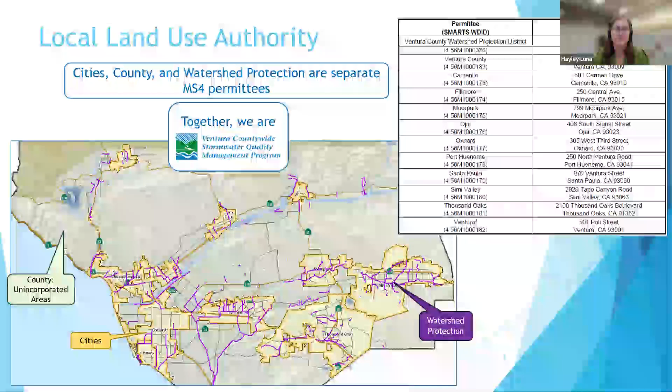Together, the cities, the county, and Watershed Protection make up the Ventura Countywide Stormwater Quality Management Program. So the countywide program, as we refer to it, is a partnership among all the cities, the county, and watershed. It's governed by a management committee, which includes representatives from each agency that provide direction on how these countywide programs should operate. However, it also has several subcommittees.

The one that comes into play today is the Planning and Land Development Subcommittee. This is the component of our MS4 permit that the TGM requirements fall under. Peter is the chair of our Planning and Land Development Subcommittee, so he'll have a lot of great topics since that subcommittee was responsible for developing the 2025 TGM.

I serve as chair for the management committee for the countywide program and support all of the initiatives that the different subcommittees work on, as well as all the representatives from the different agencies. Each agency has representatives that attend each of the subcommittees to provide local input from their municipality and how they are implementing requirements of our stormwater permit.

So that's some brief background. Peter's going to get into a little bit more detail about water quality. Thank you, Hayley. So yeah, we're going to kick off this next topic just as a water quality background. So next slide.

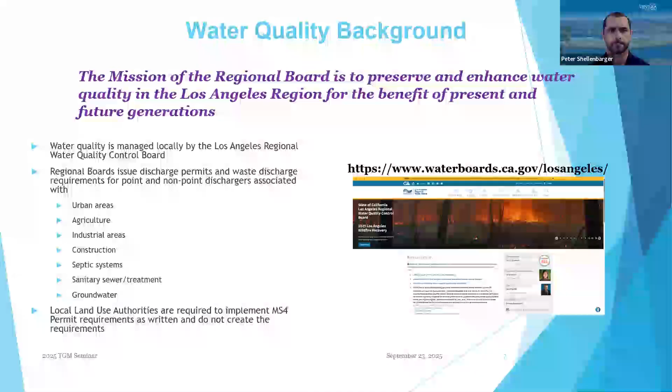So the Los Angeles Regional Water Quality Control Board has adopted 4 MS4 permits in the county. The first was adopted in 1994, Ventura County MS4 permit. The second was adopted in 2000, which was also a Ventura County only MS4 permit. The third was adopted in 2009, was challenged and readopted in 2010, only Ventura County permit. And then the fourth and current MS4 permit for Ventura County is a regional permit, which includes Los Angeles County and Ventura County under one regional permit, and it was adopted in 2021. Each permit includes more stringent and prescriptive requirements as more information and data is available.

Next slide. The regional phase 1 MS4 permit has 6 minimum control measure programs. These are required programs that each agency is required to implement. We will be talking about the planning and land development program specifically today. This relates to post-construction BMP implementation, also known as low impact development. So next slide.

So what are the goals of the planning and land development program? Well, it's the mitigation of potential pollutants from urbanization and urban surfaces, the implementation of non-structural best management practices, and the construction and implementation of structural best management practices. It's really focused on source control and site-specific source control to control potential pollution where it is generated. Next slide.

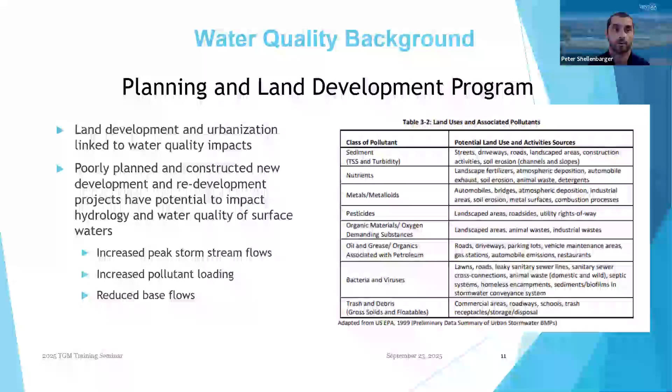We want to note that US EPA and the California Water Boards are really looking at a paradigm shift. So moving away from curb and gutter, transporting stormwater quickly away from development projects, and moving away from small footprint flow-based treatment approaches, and moving the state towards the concept of managing stormwater the way that natural environments do, through infiltration, evapotranspiration, capture and use, biofiltration. And in doing so, this can promote healthier soils, can recharge groundwater, can provide flood reduction benefits, reduce urban heat island impacts, improve water quality, etc.

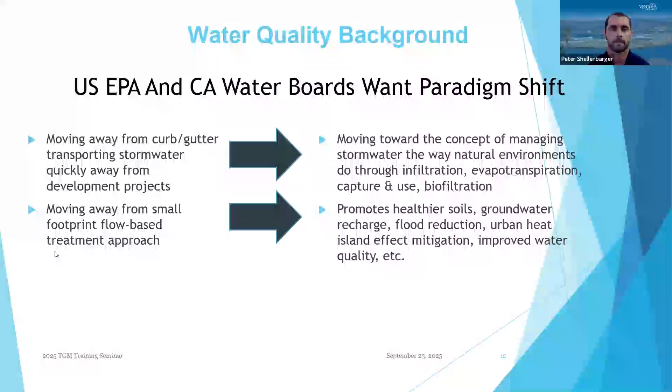So the next topic is really just, hey, we updated the technical guidance manual. This is just general information.

The 2025 Ventura County Technical Guidance Manual for Stormwater Quality Control Measures was created to reflect the changes in the 2021 Regional MS4 permit. The majority of the content within the 2025 TGM is the same as the 2018 TGM. However, we shifted information into different sections to try to improve the readability and the use of the document. I will note that the 2025 TGM should apply and be used for entitlements and new projects that are not deemed complete for stormwater mitigation by May 12th, 2025. If you have any questions about what is deemed complete for stormwater mitigation, please reach out to your local land use authority for clarity.

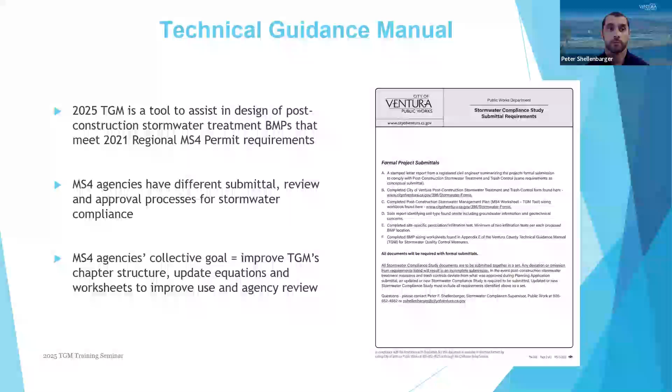I will note that the MS4 agency's collective goal in the 2025 TGM is to improve the chapter structure, to update equations and worksheets, to improve its use, not only for the development community, but also to speed up agency review.

Each TGM version has really built upon the past versions, with the first TGM released over 20 years ago. The 2002 TGM reflected the 2000 Ventura County MS4 permit requirements. The 2011 TGM, the updated 2015 TGM, and the updated 2018 TGM reflected the 2010 Ventura County MS4 permit requirements. And finally, the current 2025 TGM reflects the 2021 Los Angeles Regional MS4 permit requirements. As I noted before, the TGMs are being updated for consistency with current regulatory requirements, and when we find something that needs to be improved, we take it upon ourselves to update it.

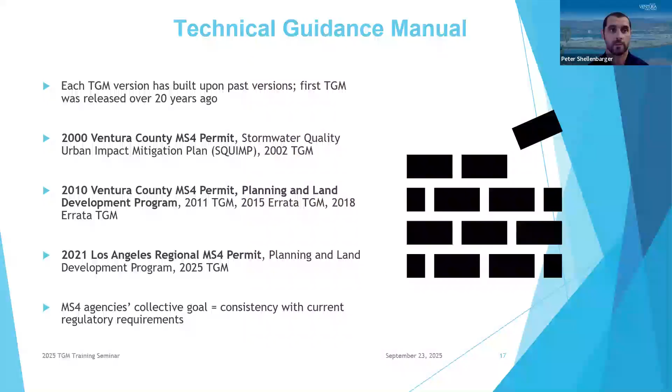The TGM, as I said, is a tool that provides resources and specifications to comply with the regional phase 1 MS4 permit.

Los Angeles County and Ventura County now have the same planning and land development requirements because we were under the same permit. These requirements are very similar to the 2010 Ventura County MS4 permit and the 2012 Los Angeles County MS4 permit.

Just to reiterate, the 2021 MS4 permit, just like the previous MS4 permits, require agency review, approval, and plan checks to ensure that the new and redevelopment projects are implementing post-construction BMPs as requirements as outlined by the permit itself. These are strict adherence to MS4 permit requirements that the local land use authority needs to ensure are being met.

New and redevelopment projects that are triggering the planning and land development requirements require operations and maintenance plans and maintenance covenants to ensure that long-term maintenance is provided to these BMPs in perpetuity. I will note that routine maintenance of the right-of-way, emergency work, reconstruction of parking lots that keep existing line and grade, and the implementation of ADA requirements that also maintain existing line and grade typically do not require stormwater mitigation incorporation, but if you have questions regarding what is referred to as routine maintenance, please reach out to your local land use authority for clarity.

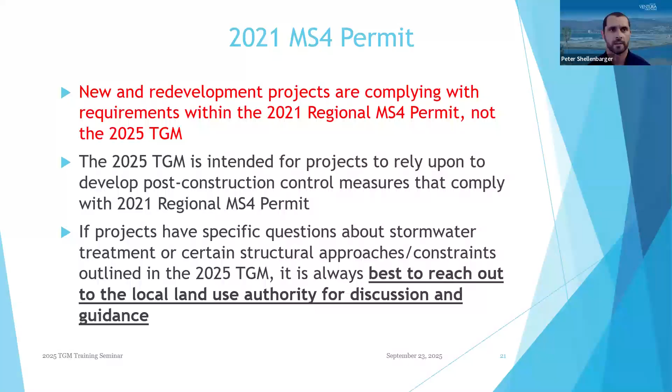As noted before, if you have project-specific questions about treatment or constraints of a site, it is always best to engage your local land use authority early during the entitlement phase so that you can work out any challenges early on, to not slow down the project during entitlement and approvals, and so that it doesn't occur during plan check.

In the next few slides, what you're seeing in red is just a change. I just want to highlight changes under the 2021 MS4 permit that are important.

With regards to hydromodification management requirements, priority development projects within natural drainage systems in Los Angeles County are required to implement hydromodification controls. But only priority development projects disturbing land areas of 50 acres or greater in Ventura County are required to implement hydrological control measures. This should decrease the number of projects subject to hydromodification management in Ventura County, and it may require more projects in Los Angeles County to control for hydromodification.

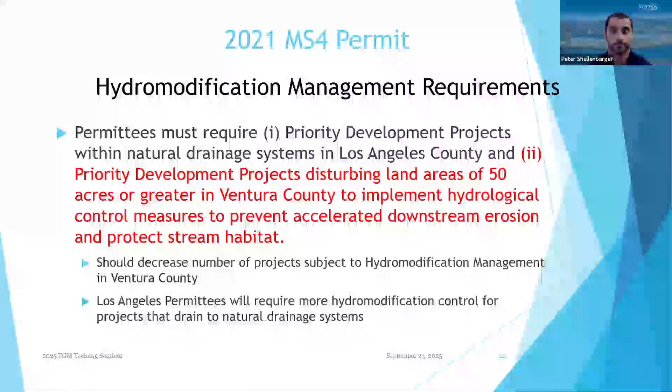In terms of water quality and flow reduction requirements, I just want to highlight that the stormwater quality design volume is the volume of water that post-construction BMPs need to mitigate, and it has been updated in the 2021 MS4 permit. So the SQDV is defined as the greater of the following: the runoff from the 3/4 inch 24-hour rain event, or the runoff from the 85th percentile 24-hour rain event. In the 2010 Ventura County MS4 permit, this was an 'or,' but under the 2021 MS4 permit, this is whatever is greater between the two.

I will note that the 85th percentile 24-hour rain event is available on a GIS web-based map on the Ventura County GIS portal. It is linked in the 2025 TGM document, so it's very easy for projects to identify the 85th percentile 24-hour rain event right now. The stormwater quality design flow is a flow-based measurement.

To utilize flow-based measurements under the 2021 MS4 permit for post-construction BMPs, you need to have the executive officer approval from the Los Angeles Regional Water Quality Control Board. You will need to filter or treat the maximum flow rate of runoff produced from a rainfall intensity of 0.2 inches of rainfall per hour for each hour of a storm event, or the maximum flow rate of runoff produced by the 85th percentile hourly rainfall intensity. It also needs to be certified for enhanced metals treatment under the Washington State Department of Ecology's TAPE program.

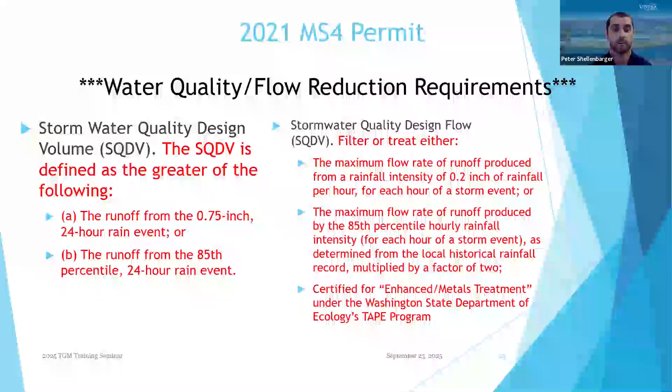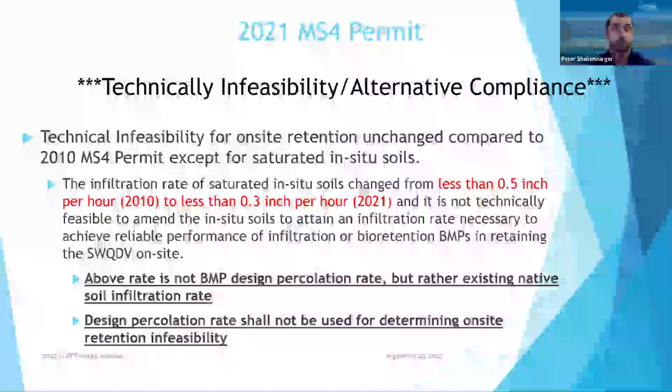For changes under the 2021 MS4 permit regarding infiltration infeasibility, under the 2010 MS4 permit, technical infeasibility for infiltration was infiltration rates less than 0.5 inches per hour. Under the 2021 MS4 permit, it is infiltration rates that are less than 0.3 inches per hour. I will note that it is not technically feasible to amend the local soils to attain an infiltration rate necessary to achieve reliable performance of infiltration.

The above noted rates are not BMP design percolation rate, but rather the existing native soil infiltration rates. The BMP design percolation rates used for sizing BMPs shall not be used for determining on-site retention infeasibility.

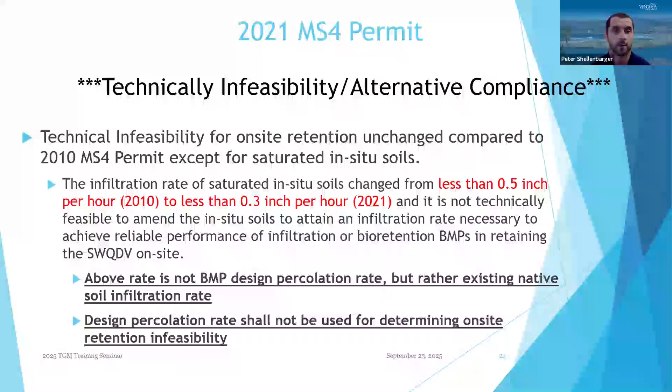The structural BMP water quality mitigation hierarchy, or the steps to identify what type of BMP to implement on site, has not changed. The approvals have changed, but Ty will go into that a little later today. The first priority outlined in the 2021 MS4 permit is on-site infiltration, bioretention, or rainwater harvesting and use, which is a BMP focused and sized for a volume of water. This is retaining the water on site.

Now, if the first priority above is infeasible, on-site biofiltration, off-site groundwater replenishment, and/or off-site retrofitting, using a BMP that is sized for a volume, can be pursued. And if priorities 1 and 2 are infeasible, then on-site flow treatment can be pursued, which is a flow-based or flow-sized BMP. However, as I noted before, this requires the executive officer approval from the Los Angeles Regional Water Quality Control Board.

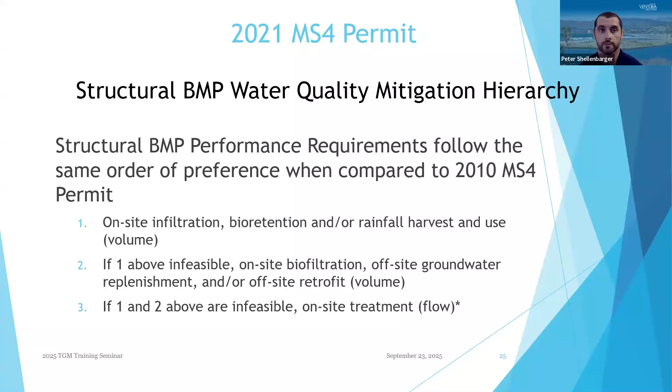I'm not going to be talking about retention, only the alternative compliance and on-site biofiltration. So on-site biofiltration continues to biofilter 1.5 times the required retention volume.

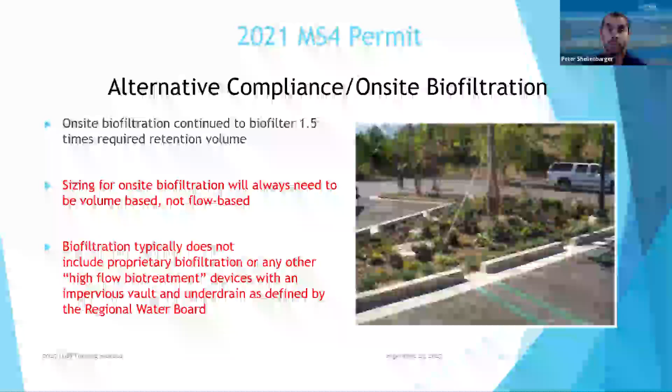Sizing for on-site biofiltration will always need to be volume-based under the 2021 MS4 permit, and it cannot be flow-based. And biofiltration typically does not include proprietary biofiltration or any other high-flow biotreatment devices with an impervious vault and underdrain, as defined by the Regional Water Board.

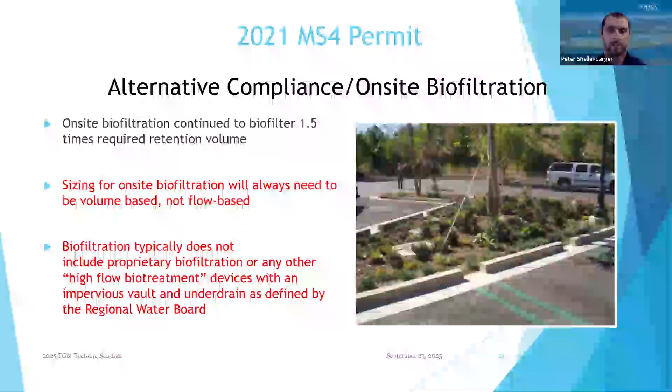So in the image to the right, you're seeing a biofiltration system that was designed per the technical guidance manual. Next slide, please.

Alternative compliance for offsite mitigation measures. There's also a way to comply with the planning and land developments program if on-site retention or on-site biofiltration is infeasible. But I will note that offsite mitigation is available, but it is really dependent upon an available agency's programs or ability to retrofit another private development, an existing private development, I should say.

So offsite infiltration projects and groundwater replenishment projects, if a project is looking for alternative compliance for offsite mitigation and you have questions about if offsite infiltration or groundwater replenishment is available in the subwatershed, please reach out to your local land use authority for questions.

These regional projects must be situated in the same HUC 12 watershed as the new redevelopment project. Also, offsite project retrofits - this is also reach out to your local land use authority for availability.

However, it is also good if you have or can partner with another private development to retrofit in a similar existing land use.

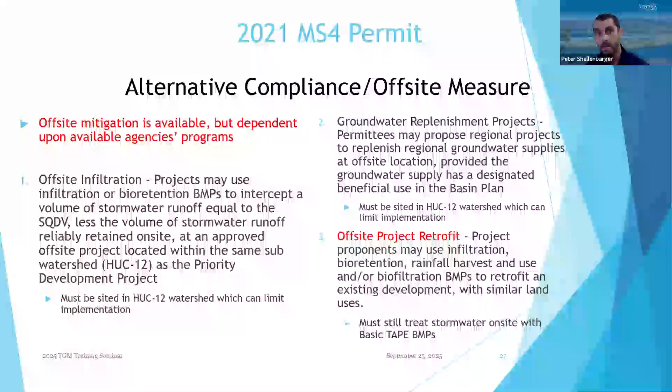Any offsite alternative compliance offsite measure needs basic TAPE BMP treatment at the new redevelopment project. So you would need to treat the water using basic TAPE BMPs of the new redevelopment project, as well as have an offsite mitigation effort. So keep that in mind.

Next slide. Under the alternative compliance on-site flow-based BMPs under the 2021 MS4 permit, there's a little bit of a change here in the approval process. So if a permittee determines that on-site biofiltration and off-site alternative compliance measures are not technically feasible, the permittee may request the executive officer allow the use of on-site flow-based BMPs.

And in the request, the permittees must outline why none of the other alternative compliance measures are feasible. And approval will only be granted to areas where other alternative compliance measures are not feasible due to significant technical issues.

So typically, you want to be discussing this with your local land use authority very early on in the entitlement phase, because typically the local land use authority will want to have executive officer approval before a project is entitled.

The permittee will submit on behalf of the new redevelopment project that is pursuing alternative compliance via on-site flow-based BMPs. However, the local land use authority will not be generating this document. It will be the responsibility of the private developer to create documents that will be submitted on their behalf by the local land use authority.

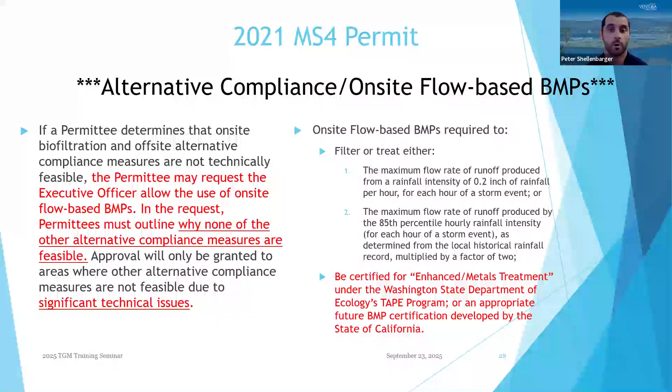On-site flow-based BMPs, as noted earlier, are going to be typically a CFS-sized BMP, and they are required to be certified for enhanced or metals treatment under the Washington State Department of Ecology's TAPE program, or an appropriate future BMP certification developed by the state of California.

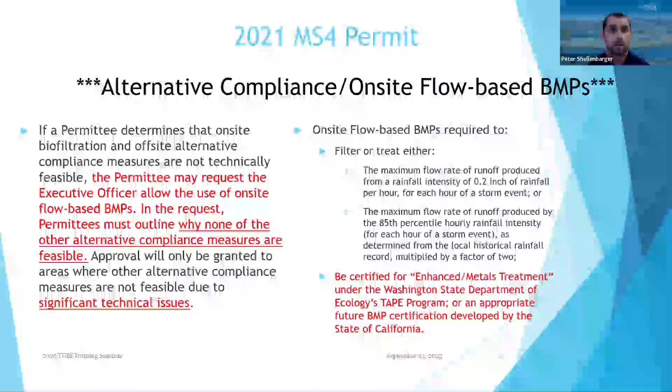And I will note that there is not a program right now for the state of California for approved BMPs. Next slide.

And I will pass this over to Tai now to get more into the technical work. Thank you so much, very much, Peter, for that overview of the MS4 permit and the TGM.

For this section, everybody, what I'm going to focus more is on the technical aspect of the TGM and also giving everybody a quick overview of the 2010 MS4 permit requirements. And the reason I want to do that is because to give us a sense of what was required before, and then we'll compare that to the 2021 MS4 permit requirement.

Then we go into the 2025 sizing calculation. And again, do a little bit of comparison. We'll look at common required items, the remove required items, the new and modify required items, as well as civil sizing calculation for your benefit.

Next slide, please. So this is a quick recap of what Peter was describing, but this is more of the numerical aspect of the MS4 permit. We have 10 different categories here for the new development triggers.

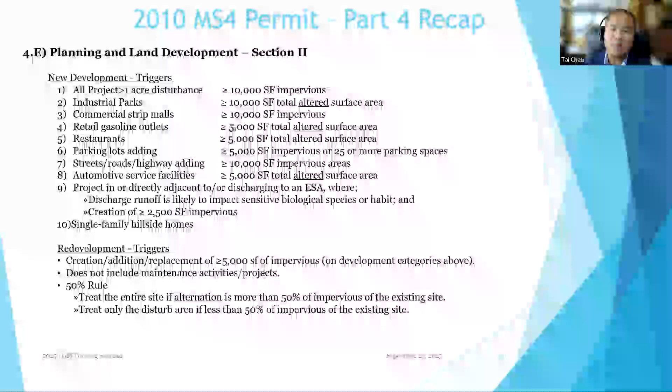For the most part, I think a lot of people are going to be focusing on item number 1 or category number 1, which has to do with the disturbance of land more than 1 acre with 10,000 square feet or more of impervious area, right?

And then we go down to the industrial park, commercial, strip malls, retail, gasoline, restaurant, parking lot, and so forth. It also includes, by the way, streets and road reconstruction or construction that are adding 10,000 square feet or more of impervious area.

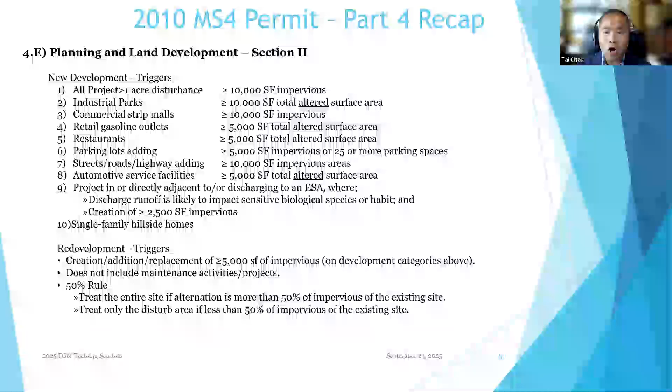When it comes to redevelopment, we want to make sure that everybody understands the 50% threshold. And of course, the trigger is when you are creating, adding, or replacing 5,000 square feet or more of impervious area on an existing project site. Next slide, please.

So when it comes to the BMP selection, this is essentially the priority in which we like everybody to go through. And this is what the MS4 permit is also guiding us. The first priority is obviously infiltration-based BMP. We want to have a system that can collect, pre-treat, and then infiltrate the runoff via surface or underground. Typically, this includes infiltration basin, infiltration trench, bioretention, dry well, as well as permeable pavement.

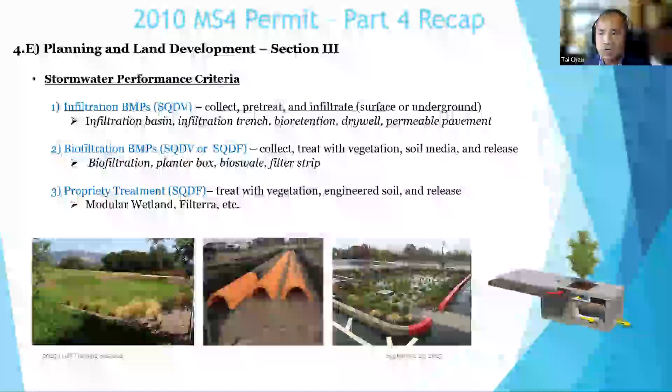Then the next category is, in the case that the soil cannot actually have adequate infiltration rate, then we move to biofiltration. So these devices are essentially intended to collect, treat with vegetation, a soil media section, and then release. They include biofiltration, obviously, as well as planter boxes, bioswale, and filter strip. And again, I want to mention to everybody again here, this is from the 2010 MS4 permit, which is for the 2018 TGM. So this is just a baseline so that we are going to see the comparison between this previous version versus the version that we have now.

Last but not least, we have the proprietary treatment devices that essentially treat with vegetation, but the soil media is extremely engineered with a very high infiltration rate. So typically you see modular wetland system. Filterra is probably one of the most popular ones we have seen out there. Next slide, please.

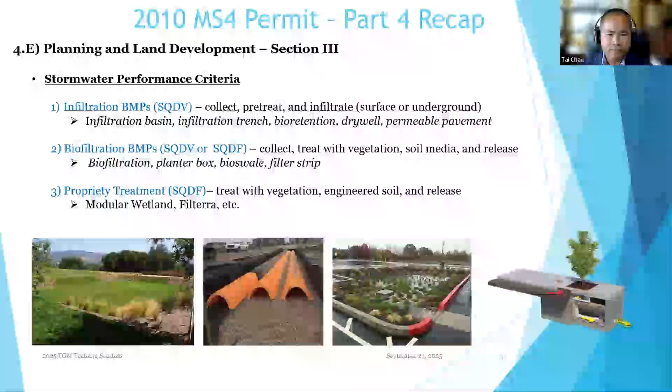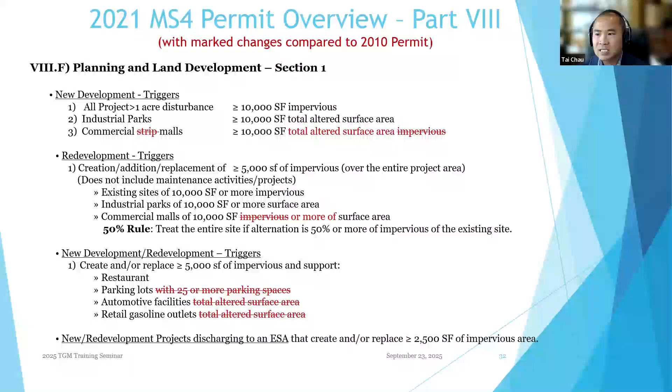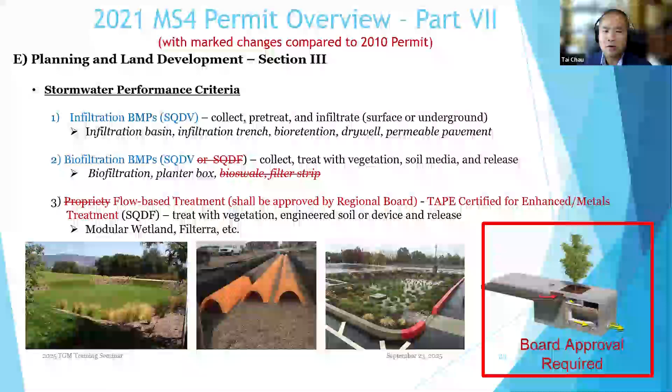So in this section, we are talking again about the stormwater performance criteria, right? And so we're still looking at doing infiltration-based BMP, and this is what Peter has conveyed previously on his slide. We want to collect, pre-treat, and infiltrate. The systems are essentially identical to the previous requirement. We're talking about infiltration basin, infiltration trench, bioretention, dry well, permeable paver. And then the next one is biofiltration. Note here that biofiltration is now SQDV, which is volume-based sizing. And we only have biofiltration and planter box. Bioswale and filter strips are no longer considered biofiltration BMPs.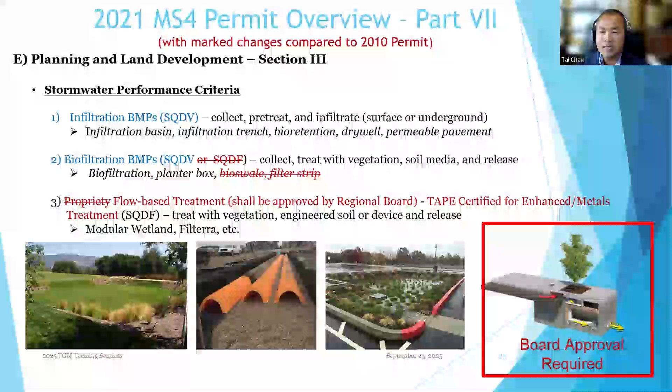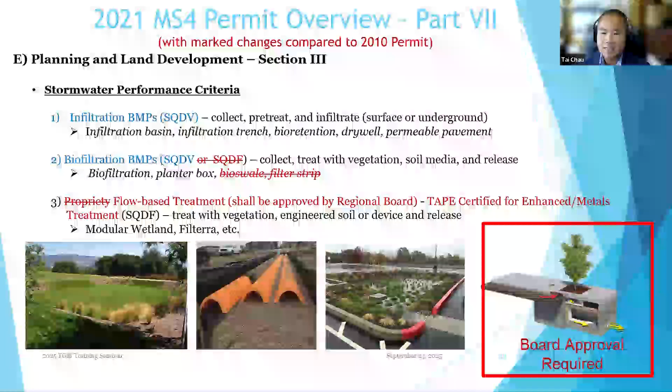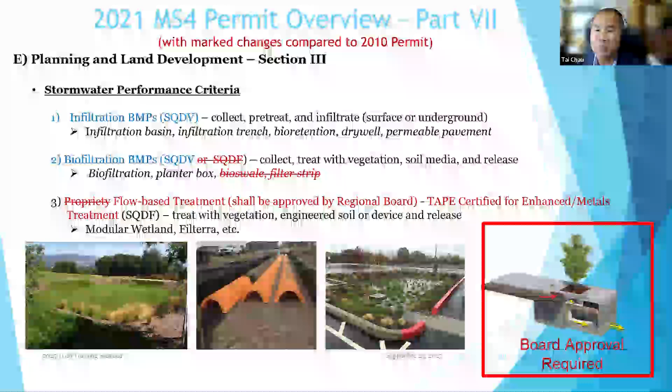However, they are considered as pre-treatment BMP if such pre-treatment is proposed for, let's just say, an infiltration basin. That is still appropriate. And thirdly, the flow-based treatment is still on the permit. It is still permitted, of course, via the executive officer approval. And it's essentially what we had last time, which is treat with vegetation, engineered soil, or device, and then release. Again, modular wetland and Filterra are the two popular systems that we have seen repeatedly proposed on many project sites. Next slide, please.

So here is a slideshow showing the technical similarities and differences. The soil infiltration rate we've seen in the last TGM indicating 0.5, but what I want to emphasize here is that the 0.3 inches per hour is still that philosophy of making sure that the infiltration basin can function properly. And then we also have the pre-treatment forebay requirement for infiltration-based basins. We still have the 5 feet above the seasonal high groundwater, just to make sure that we don't get those basins too close to the seasonal high groundwater.

And then, of course, we still require the 150% SQDV volume for the biofiltration-based BMP. The SQDV equation, which is based on the 3/4 inch or 85th percentile 24-hour event, is still the same. There have not been any changes on that equation. The SQDF equation, again, it's still the same thing, right? And even though the 85th percentile hourly rainfall event is also a criteria, I think most of the projects are going to use the 0.2 inch per hour just because that's easier and readily available.

The things that have been removed from the 2025 TGMs are the 5% EIA, right? The A retained has been replaced as A project or A tributary. The bioswale and filter strips as primary BMPs have been removed, now considered as pre-treatment. And the 80% average annual runoff volume, that has been removed.

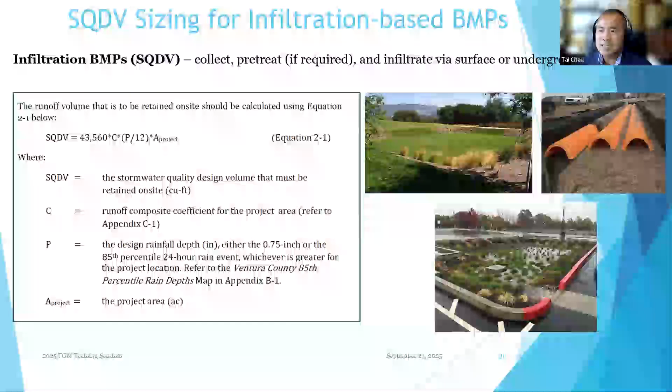Next slide, please. Okay, so when it comes to infiltration-based BMP, it's simply to collect, pre-treat, and then infiltrate. The SQDV equation that you see here is very much the same as before, and it's really simple. It's only depending on 3 things. The first one is the runoff coefficient. This is the composite coefficient. Your project site may have 2 tributary areas, or you may have a project that is simply 1 tributary area. In this case, that's the equation that we see here.

But the runoff coefficient in this equation, you want to make sure that it is a composite, meaning it is a mixture of the impervious and pervious area within that tributary. And then we're talking about the P, which is the 3/4 inch or the 85th, whichever is higher of the 2. And then the A project, which is A tributary as well. So this equation is pretty simple. All it is doing is calculating the rainfall volume that is landing on the project. Next slide, please.

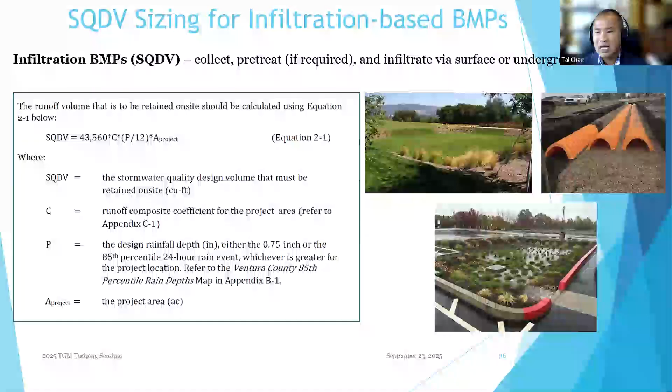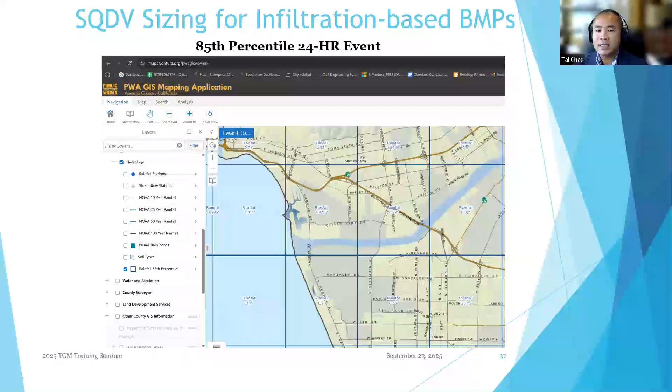And this is the 85th percentile 24-hour event GIS map from the County of Ventura. So this is something that everybody would need to do: go in and locate your project, making sure you have that 85th percentile rainfall event, identify it, and make sure that it is indeed higher. If it is not higher, then you go back to the 3/4 inch. Next slide, please.

Okay, so when it comes to the sizing of the system, you want to use the TGM worksheet in your design calculations. I understand that some people may want to modify and make their own, and in most cases that is okay, but we highly encourage using the worksheet. The reason why is because the worksheet is very familiar to all of us as the governing agency. So if we see something that is familiar, it allows us to review the project quicker and locate the volume and the project area in a very efficient manner. So please do use the worksheet in your design calculations as you submit them for entitlement purposes,

as well as construction documents. So in this example, we have a project site that is 10 acres with 60% total impervious, right? And of course, for simplicity's sake, we are using the 3/4 inch. So it's simply a plug and chug. We have 10 acres, we have a C composite of 0.59, and then we have the rainfall depth, which is 3/4 inch divided by 12, and that is what we get, 0.06. I think it's 0.0625 if you want to carry out the decimal. But in essence, you just plug it in.

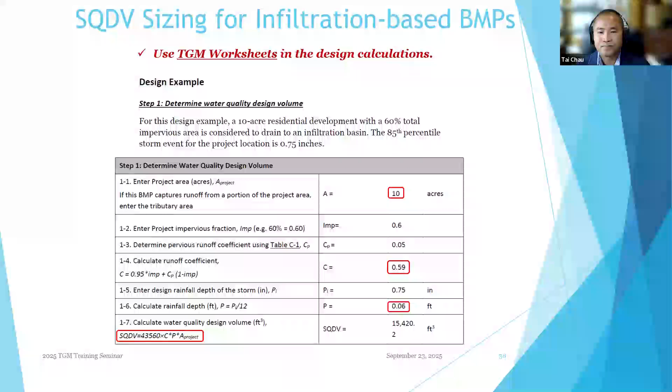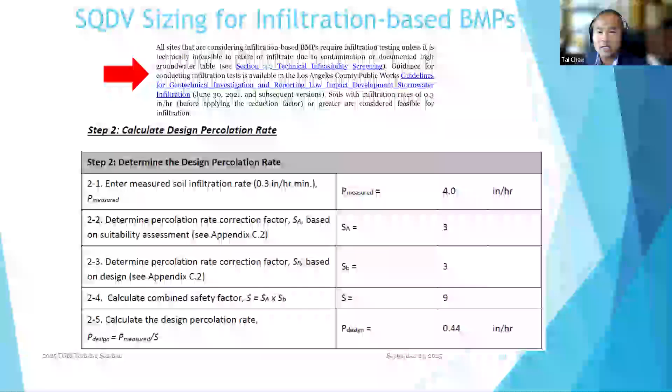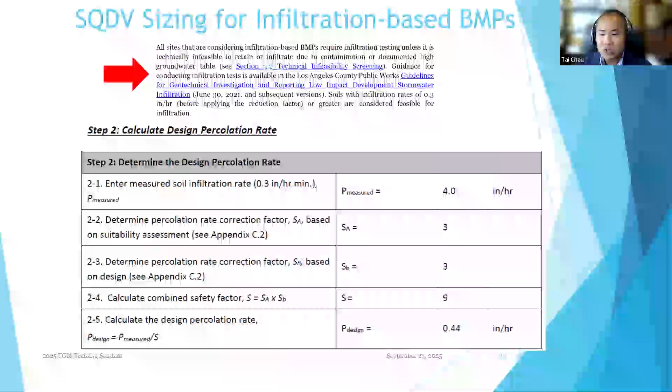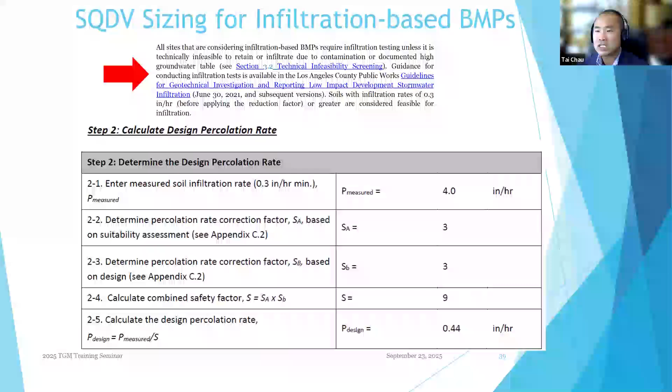However, the infiltration rate of 0.3 inches per hour is the applicability for feasibility, before applying the reduction factor. So make sure you review that very carefully before you go down the route of choosing a system, whether it is a biofiltration or infiltration-based system. Essentially, once you have that P measure rate, you simply apply the percolation correction factor from the TGM itself. This, in essence, is a long-term factor that allows the system to function as intended over a long period. And at the very end, what you have is a P design rate that is significantly lower than the P measure. The percolation rate correction factors, SA and SB, are going to be based on your judgment of what you think is best, based on the design and construction, as well as the physical location of the BMP. Next slide, please.

Okay, so this slide right here is very critical for a lot of engineers, from my professional experience. Now we know the volume, right? Now we know the infiltration rate. So how do we find out the required area? In this example, we actually have two different options. What you want to pay attention to here is the Dmax. The Dmax is the maximum depth of ponded water, both on the surface and in the soil and the rock, that is allowed based on the natural infiltration rate of the soil at the project site. So in this case, we have 2.64 feet as the maximum.

And then on this worksheet, you enter the DP, which is the ponding depth. The ponding depth has to be less than the Dmax minus the depth of the soil. So if you work the other way around, what it's saying is that, if you look at that figure on the right-hand side, the DP plus the NT multiplied by the DT shall be equal to or less than the Dmax.

That's what it's saying. So that figure is something that you've got to pay attention to. And then last but not least, once you plug in all of that, you want to figure out the footprint of your infiltration basin. And there are two equations that you've got to pay attention to here. One equation is for the infiltration basin.

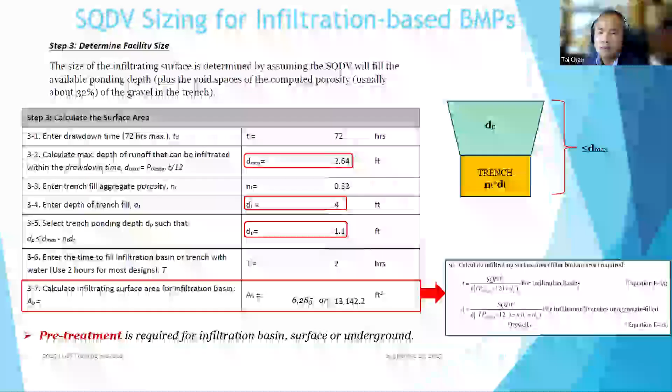Last but not least, make sure whether pre-treatment is required, depending on whether you are selecting a surface-based basin, underground, or bioretention. I believe bioretention does not require pre-treatment. It is always encouraged. Next slide, please.

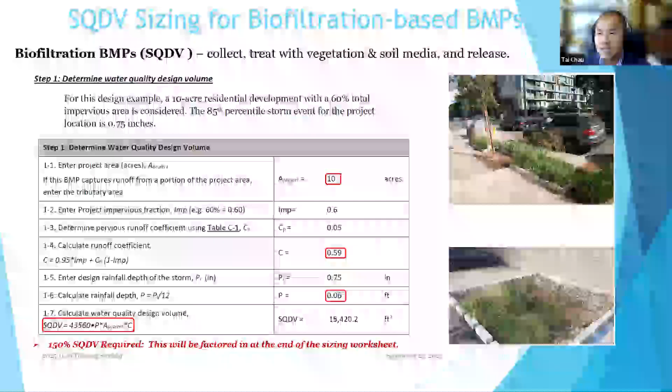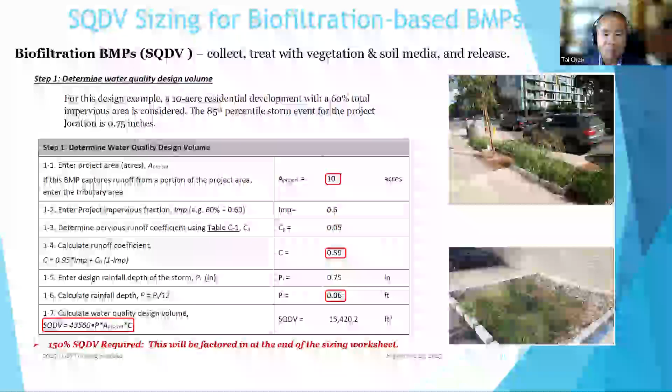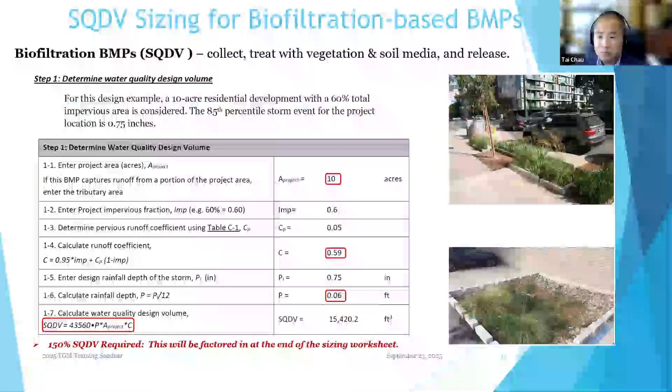So we are moving on to the biofiltration BMP, which is still an SQDV-based treatment system. In this design we are looking at essentially a biofiltration system or a planter box; they function identically. In this example, we are still using essentially the same equation as in the prior example. The SQDV here is the same: 43,560 multiplied by the rainfall depth, which is 0.06 feet, multiplied by the project area, which is 10 acres, and multiplied by the composite C coefficient, which is 0.59. And again, we get the exact volume as we did under the infiltration-based design.

Now, pay attention. When biofiltration is used, the 150% factor applies. It's not applied here yet. We are just simply getting the SQDV. The 150% factor will need to apply when you get to the step when you're actually sizing the footprint of the system. Next slide, please.

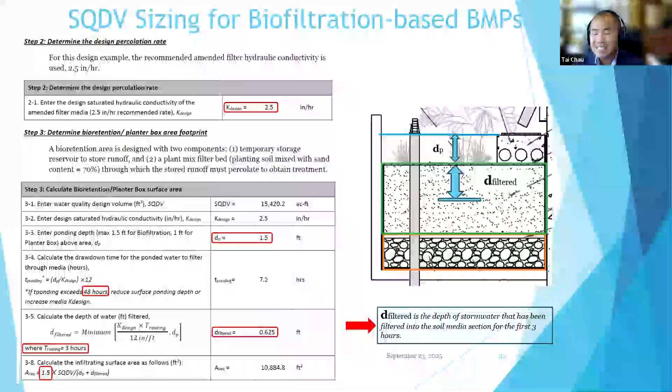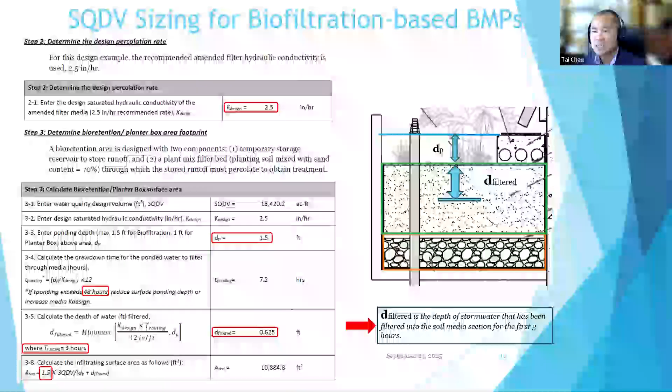So when it comes to the calculation of the area here, we now need to incorporate back the 150% volume. For that 150% volume, we want to take the SQDV, multiply it, and simply divide that by the dp plus the d filtered. That would essentially provide the project with the footprint of the biofiltration. Obviously, by doing so, this system is going to be significantly bigger than the infiltration base. So we highly encourage everybody to explore your project site, explore your soil, to make sure that you can infiltrate. There is a lot of benefit to coming up with a geometry that best fits the project site when an infiltration-based system can be used. But we understand that there are projects with clay soil that cannot infiltrate, so certainly this biofiltration is also a good system that can be utilized in those cases.

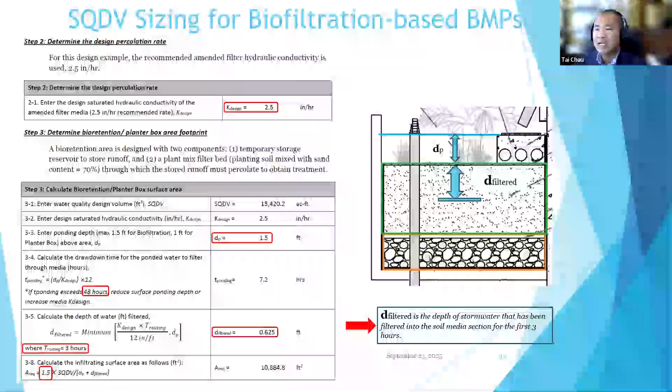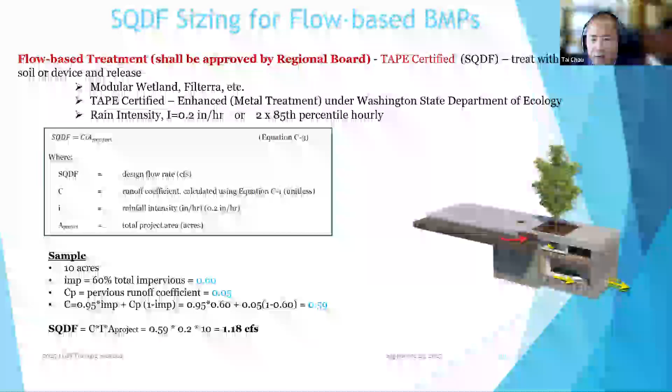Lastly, but not least, we'll touch really quickly on the flow-based treatment. The equation is quite simple. We're talking about SQDF, which is essentially the runoff coefficient composite, multiplied by the rainfall intensity, usually 0.2 inches per hour, and then multiplied by the project area or tributary area. In this case, we are looking at a tree filter type, using the same project we've used throughout the presentation. We have 10 acres, the project has 60% total impervious, and a pervious runoff coefficient we're assuming is 0.05. Using the composite equation, we have a C value of 0.59, and at the very end we have a flow rate, SQDF, of 1.18 cubic feet per second.

So the sizing of the SQDF is straightforward, as you can see here. Each individual designer will need to go to the Washington State Department of Ecology and select the appropriate device, making sure that device is the enhanced, a.k.a. metal treatment device. You want to look into each device to see how they're sized to provide those treatment flow rates. The capacity flow rate for each device will vary based on who is making it and how they're designing for it. But remember, in my opinion, this is the last resort because it will require regional board approval. So I would highly encourage people to go through the infiltration base and then the biofiltration, understanding that in some cases we may have to do this flow-based device.

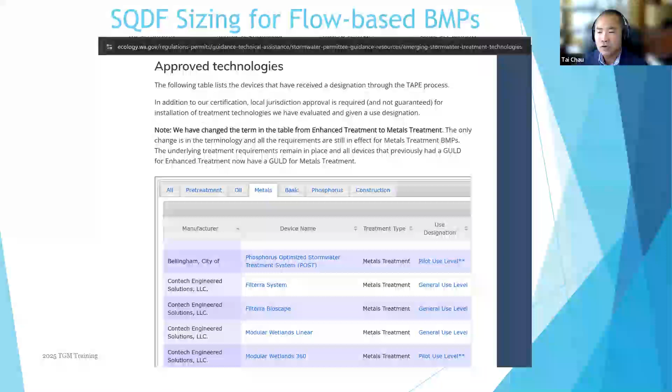Next slide, please. So that's pretty much it for the sizing calculation samples. I look forward to the questions and be happy to provide feedback. Back to you, David. All right, thanks Tai, Hayley, Peter.

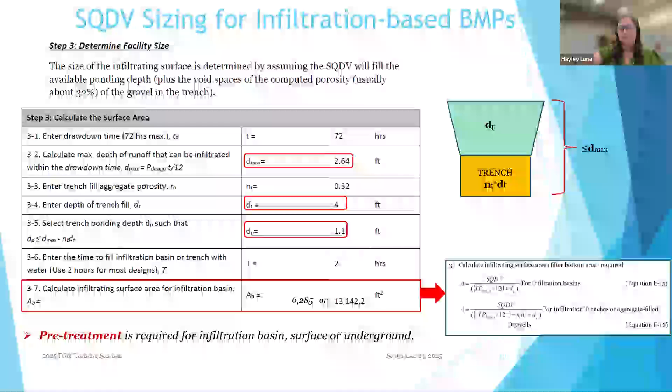Is this slide 40? Yes, this is slide 40, speaking of bioretention systems having underdrains. I believe we've discussed this during previous meetings, so we'll be making an adjustment to the 2025 TGM — bioretention systems shouldn't have a perforated underdrain, only if it's sized as infiltration, right? Yes, if it's sized as an infiltration BMP example, I would say no underdrain. Sorry, Peter, to jump in. Oh no, that's perfect. But if you're sizing it as a flow-through biofiltration BMP, then you would have an underdrain, and you'd have to treat 150% of the SQDV.

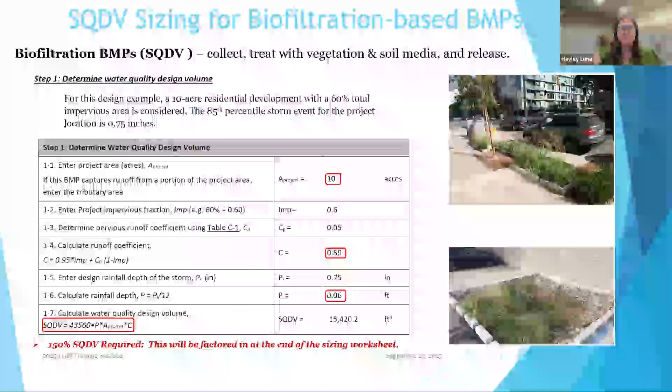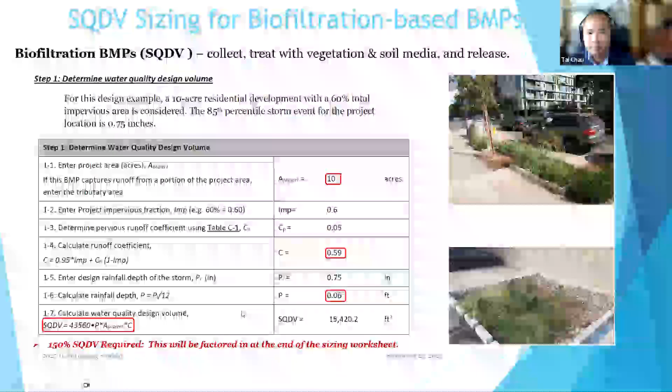If we take a look back at slide 40 — can you go back to slide 40 for me, David — the SQDV for the infiltration-based basin is the same for all of them. The calculation comes down to sizing the surface area for that facility. So the equation is simply the SQDV divided by the depth of that facility. The depth of the surface-based infiltration without any rock is going to be the DP mostly.

But if we're talking about an underground infiltration basin, then it's more appropriate to use the second equation shown here in the bottom right-hand corner, for infiltration trenches or aggregate-filled dry wells. So the underground infiltration basin uses that equation because it accounts for the aggregate rock. In this case there is no ponding depth, so the DP essentially disappears, and NT multiplied by DT becomes the governing section. The porosity of underground basins is typically much higher than 32% — it could be as much as 75% for some systems. So you just have to make sure the DP is indeed 0, and use NT multiplied by DT accordingly.

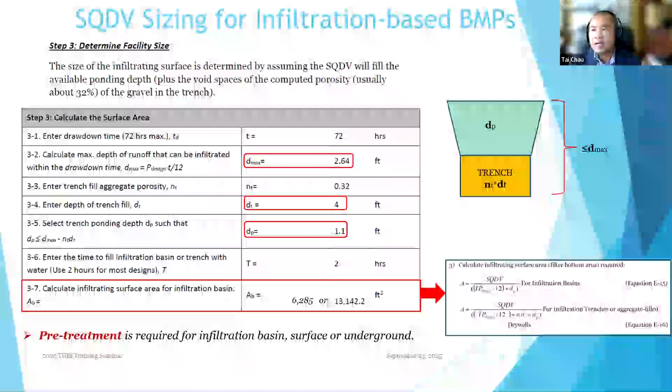I'll make sure to go back to your question and provide additional information in the written responses. And I'd add, I've seen it done both ways through the county, and I've seen it done adequately both ways — it depends on your calculation method. Using INF-6, I've seen HydroCAD models supporting those calculations in the past. So I'd say it's really important to talk to your local land use authority about the process you're thinking of using to show sizing if you're trying to choose between those two options.

All right, Kinsley's got another question. Why is there a limit to the tributary area for the planter box option? Is that flexible depending on the size of the planter box and the way you distribute the roof drains?

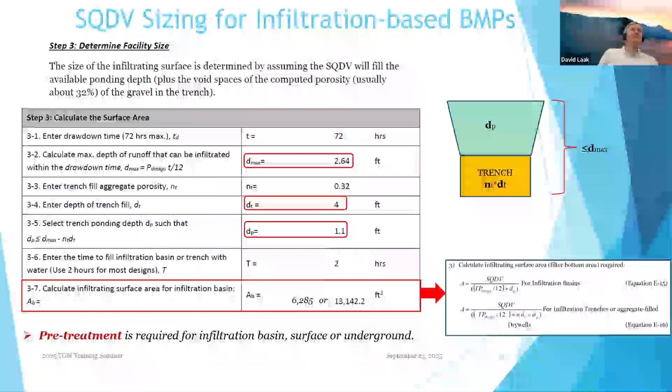Haley? I think I'm actually going to throw that to Tai. Tai, do you have thoughts? I don't necessarily understand the question to its full extent. If Kinsey, if you can type another explanation to that, I would appreciate it.

But I will provide the response, generally speaking, that we don't necessarily want to limit the capacity of the system. So if you have a roof drain, which is rather large, and you want to drain that into a planter box for treatment, I don't think... we as a public agency, we would be happy to work with you. But as far as I know, I don't think there is a tributary.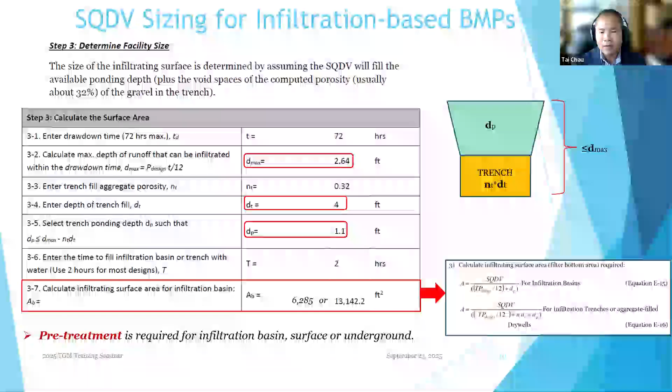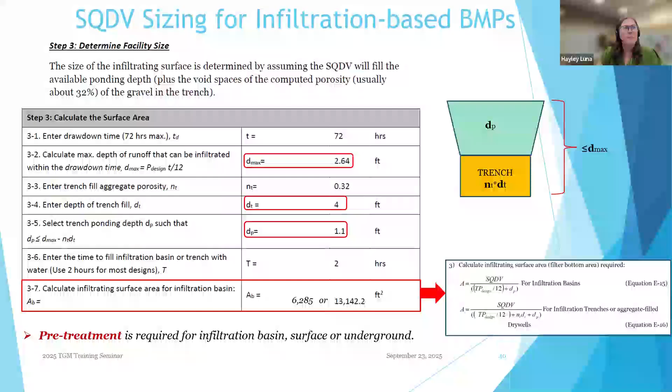Yes, thank you Nicole for talking about the 15K. We'll probably have to revisit that as a committee to understand the limitation and why it is there. But as the local agency, for me anyway, I'll speak on the city of Oxnard, would be happy to work with you on that limitation. That might be something that was carried over from the last version of the TGM that we could review.

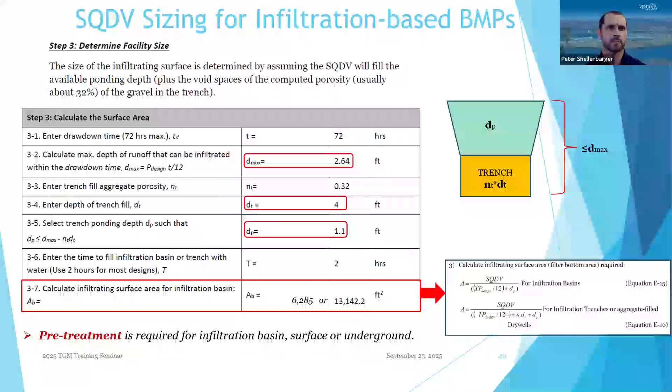Absolutely. And like I said during my presentation, this is that opportunity to reach out to the local land use authority to ask questions. If there's a constraint in the design criteria of a specific BMP in the TGM that is somehow challenging to meet given layout and site design, reach out to your local land use authority and ask these same questions. And we might be able to work with the design or increase the tributary area for certain situations.

All right, and Nicole's got another question here. If I have a site where infiltration is infeasible, can I use a proprietary biofilter if it's sized to treat the biofilter design storm volume, and I can show that it will provide better water quality than a planter box?

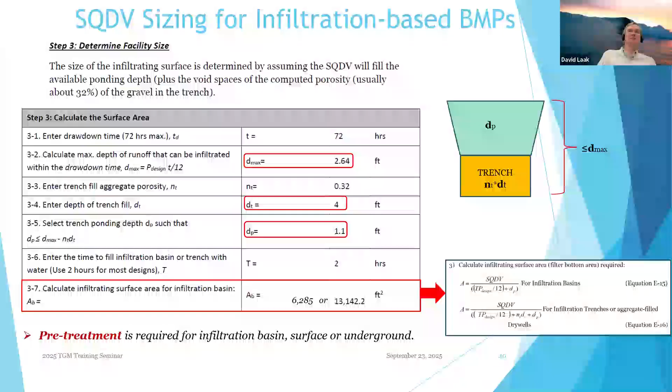Peter? Tai? I can take that, David. As presented in the MS4 permit, a proprietary device has now been allocated to the flow-based treatment, which has to be approved by the regional board. So our recommendation is for that project in particular, you want to use the biofiltration first method to evaluate the potential of where you can place the system. But to answer your question, the answer is yes and no. No, we cannot approve it. Yes, the state may be able to approve it through this TAPE certified process.

Peter or Hayley, do you have any more to add to that? I would just note that it would require the regional board approval. That's the big no.

All right. And next up from Kurt, are the TGM GIS layers hosted on the Ventura County REST server? I don't know what the REST server is. Does anyone? Kurt, you can chime in and let me know. I think you're the person to answer that, Dave. Not sure what the REST server is, but all the layers are on the Ventura County Public Works GIS viewer.

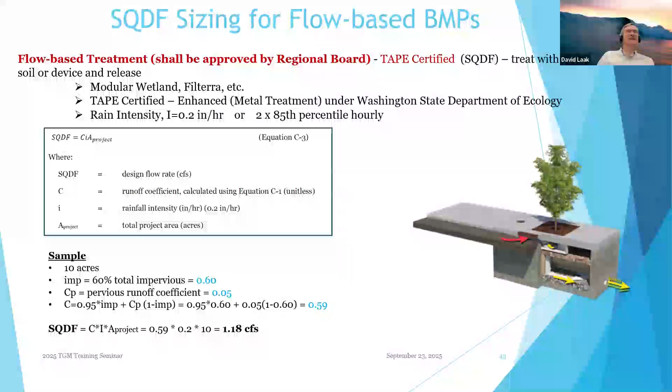And the link's in the chat there up above. Hey, Kurt. All right, can't hear you, but you can type it into the chat, and I can follow up with you offline. But all the applicable layers that you need are on the Ventura County Public Works GIS viewer.

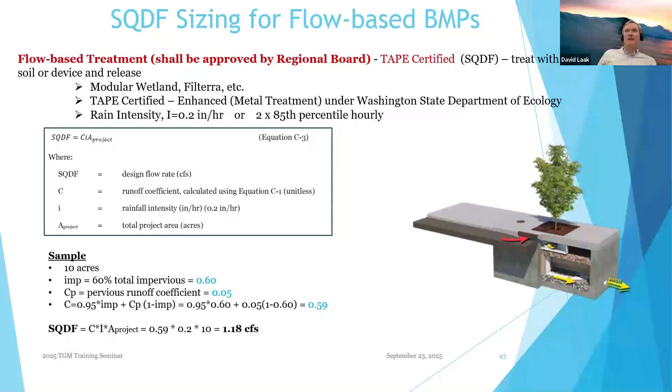Okay. Let's see. And then I think we addressed the 15,000 square foot tributary area limitation. That one will be addressed in the written response for Nicole.

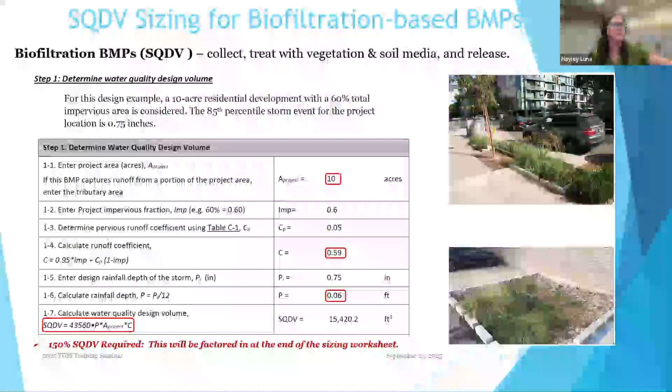And then there's a note from Mark Gray. I think we missed one, Dave. Jose asked about the BMP on slide 41. We didn't address that one yet, right? Oh, no, nope. Yes. Does Jose from ECG ask, does the BMP on slide 41 require board approval?

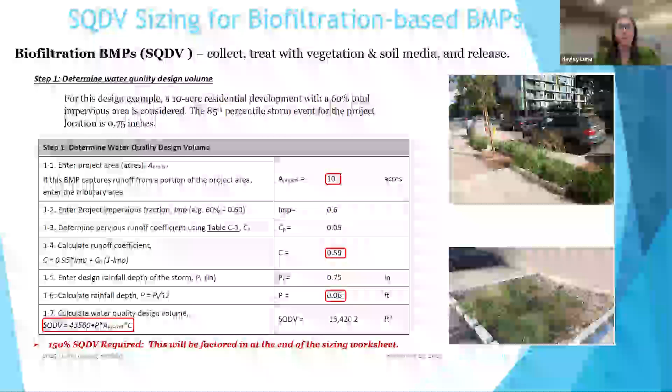So no, is the answer. So this is a biofiltration BMP sized by stormwater quality design volume instead of flow. So it does not require regional board approval. It can be approved by the local permitting authority.

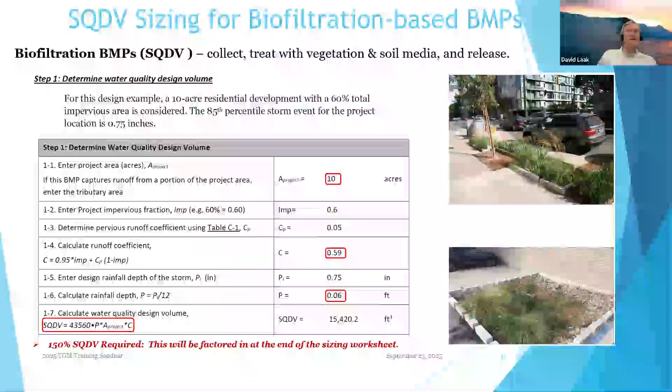Okay, and then Vico's got a question here. Whose responsibility is it to make sure the bioretention or biofiltration media meets specifications? Can you get confirmation from the provider? How do you plan on enforcing media specifications? So that'll be up. Go ahead, Ty.

So, Hayley. Yeah, I was going to note that it's going to be under review of the local land use authority. So they would be the one reviewing.

And then I see Kurt followed up that the REST server host county layers lets me load them directly in GIS applications. We don't have that set up, but I will make a note to reach out to the GIS team here regarding that, Kurt.

Josiah has a question. Historically, K through 12 schools have been exempt from MS4 permit post-construction stormwater requirements. Is this still the case?